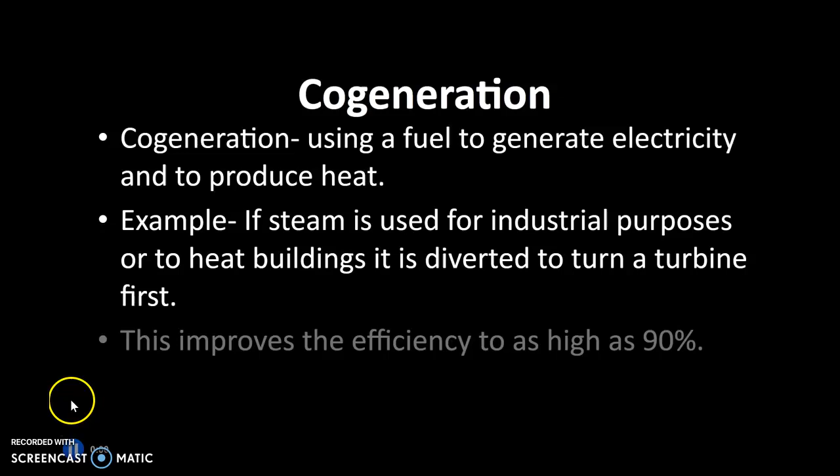This is the third lecture for chapter 16 and 17.

We are going to start off looking at cogeneration, which is something that is not commonly thought of, at least in the general public. It's the idea of using your generation of electricity for both the electricity, but also to produce heat. In the process of producing electricity, you're burning some type of fuel, whether it's coal or natural gas, and of course you're making steam, and that's turning a generator, creating electricity. But you do have this heat that is produced in the process, typically as steam, and you can use that to heat something up.

For example, at Michigan State University, they have their own power plant, and they are able to utilize that steam or heat to heat all of their buildings on the campus. It's something they've taken advantage of since the 1950s.

And of course, as you can see on the slide, it improves the efficiency of your process. Instead of just saying okay, we want electricity and the excess heat is just something that goes along with the process that we're not going to capture, most places do not, but it is a way of increasing the efficiency of that original energy resource, coal or natural gas.

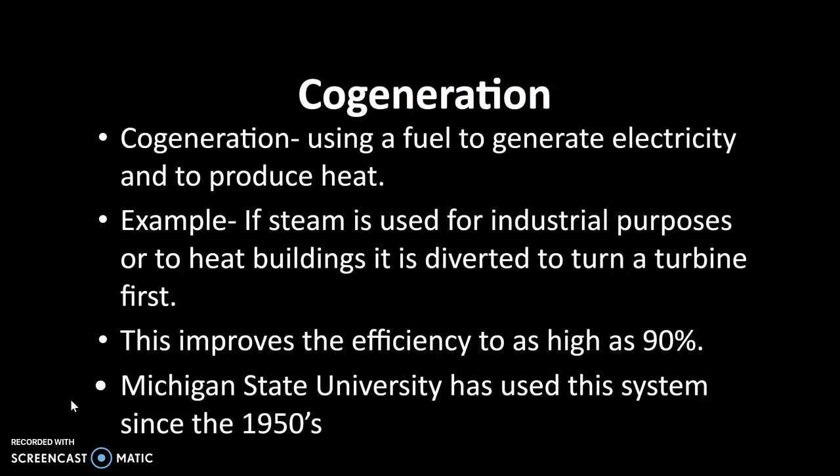In the process of making electricity or moving your car, or whatever you like to look at, that process always involves some level of inefficiency. Whenever you have a transfer of energy from one source to another, even the wind, there's some inefficiencies involved, and that all has to do with the second law of thermodynamics.

For example, in heating your home, that's quite efficient relatively speaking. Natural gas is pumped into your house, and you burn it right there to produce heat. That's fairly efficient, as opposed to electrical heat in your home. Some places do this, where you turn coal, natural gas, or nuclear into electricity that transfers to your house, and now you're heating up some element to heat your home. Every one of those transfers involves a loss of energy.

So you can see, for example, with power plants, useful energy, you're really only getting about 35% efficiency of the coal burning, which is why cogeneration is kind of nice too, because it increases that percentage up.

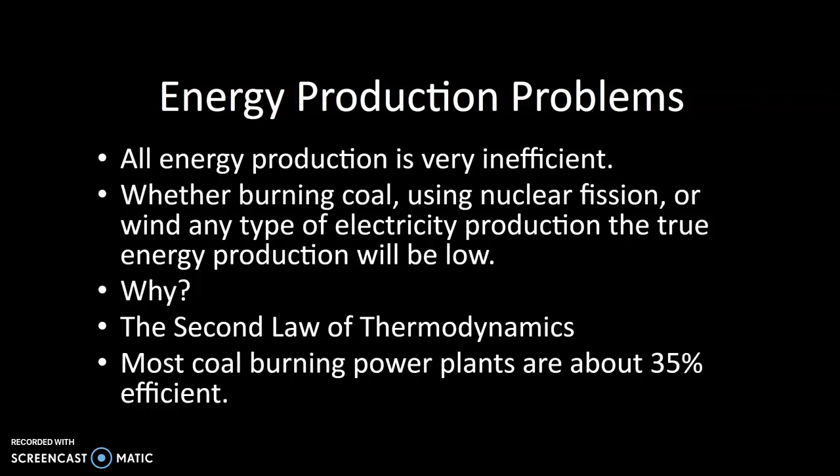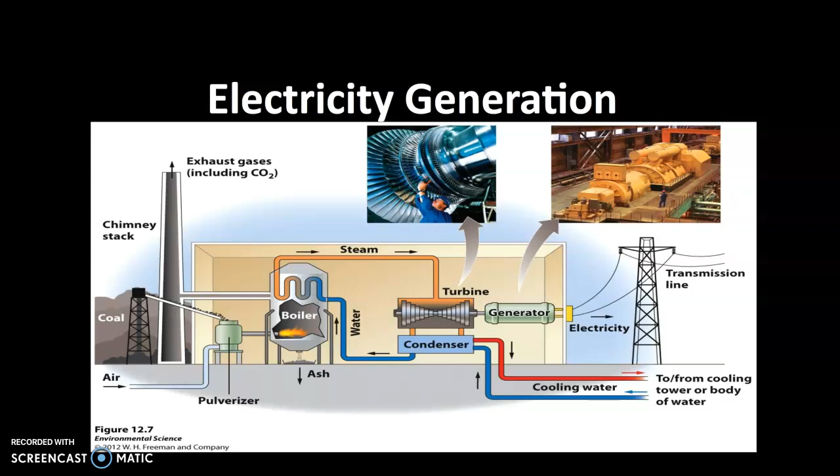This is just a rough schematic of that process, which I just talked about a second ago. I'm not going to spend a lot of time here, but you can pause it and take a look at all the guts of this. Notice a similarity with this to nuclear energy, which we'll look at shortly.

The process for nuclear is you're using uranium, and sometimes plutonium, to do the exact same thing as a coal power plant. You're just heating up water. That's all you're trying to do is heat up water, make steam, and turn a turbine. The only difference for a nuclear power plant is, of course, you're using these very dangerous materials to do that process.

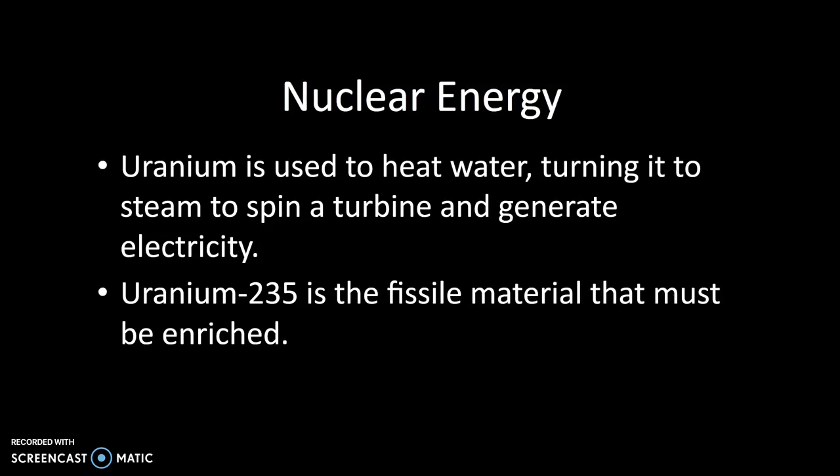You're not going to have an explosion like a Hiroshima bomb in a nuclear power plant. It's just not possible, it's not enriched to that level. But of course, you could have a Fukushima, an accident where you have radioactive material spilling out and contaminating an area for years to come, or a Chernobyl-type accident. So there's definitely risks involved in using nuclear.

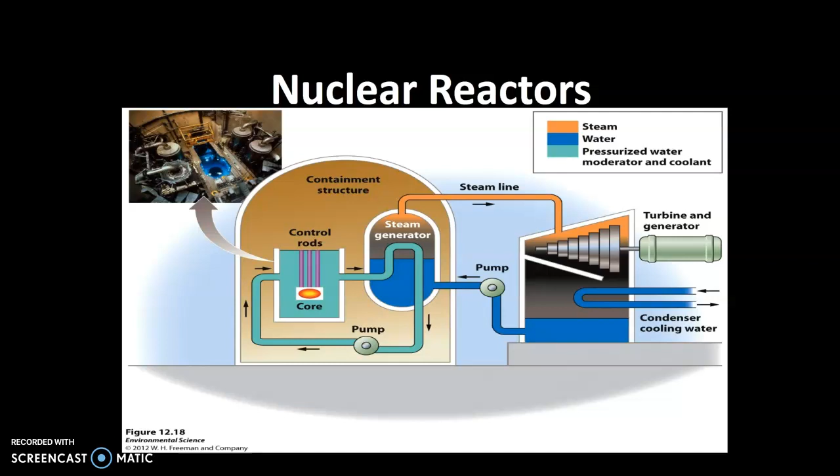Here's a schematic which is quite similar to the one from two slides ago, looking at the coal-fired power plant. It does the same thing. All you're doing is boiling water. That's the whole point of the process, to boil water to turn a turbine.

Again, looking at some of the problems with a nuclear power plant is the fact that you have this energy resource which is incredibly dangerous. In the environment, it is very spread out, and you're concentrating it, and now you have this waste material that, quite honestly, you just can't ever get rid of. And of course, with potential problems with terrorism, explosions, or natural disasters, you set yourself up for some problems in the future.

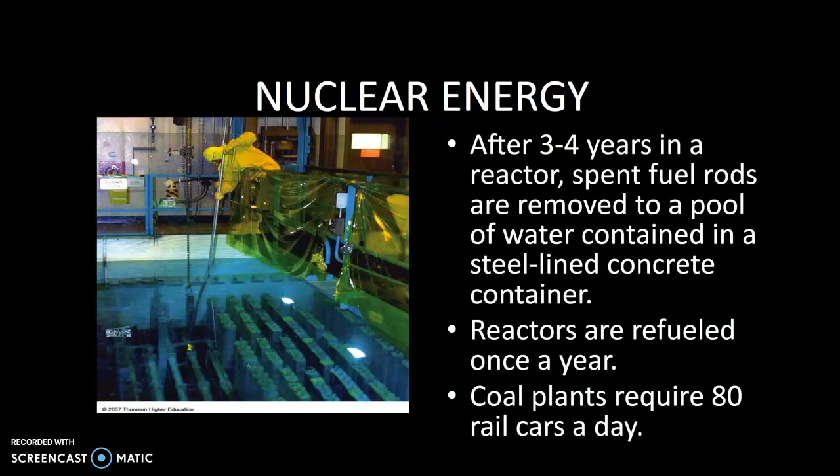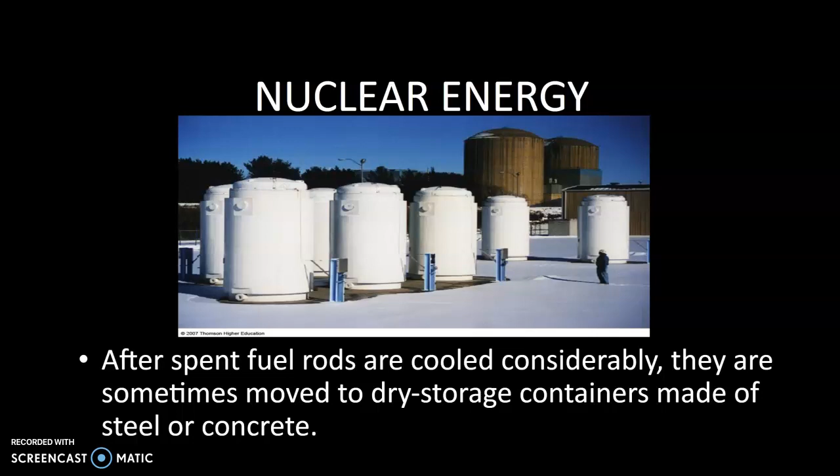Something that's interesting for all nuclear power plants is their waste materials are stored on site. We have some close to us, the Fermi nuclear power plant in the Monroe area. Every bit of waste they've ever generated in the last some 50 years is still there. Now granted, those things are very, very efficient, but every bit of their waste control rods or the nuclear fuel rods are still stored on site because you don't want to be moving those around because of potential problems that could happen.

In the last 30 years or so, we've made very few, if any, nuclear power plants. There is talk of making more, and some smaller ones. I've just been reading that in the news lately. Smaller nuclear power plants are always very expensive to make because of all the safety considerations that go into it.

When you look at the energy, it's rather cheap, but there's a huge energy cost up front, and then a never-ending cost after the use of the fuel that you have to deal with. And of course, all the public concerns and the potentials of what could happen make it relatively expensive.

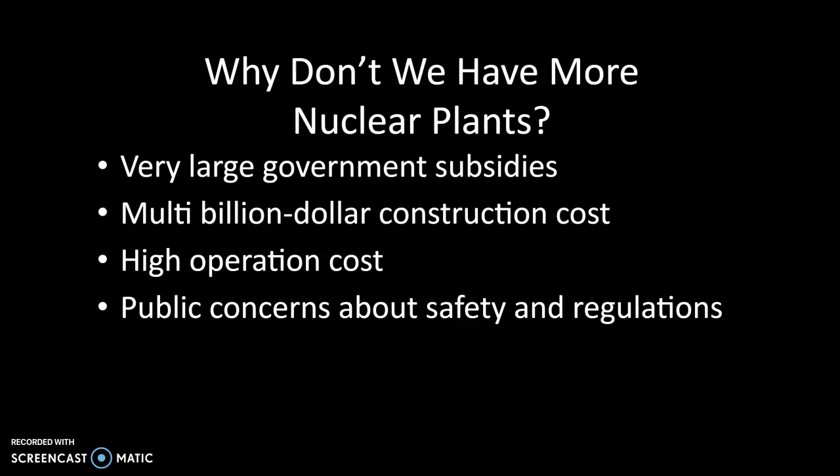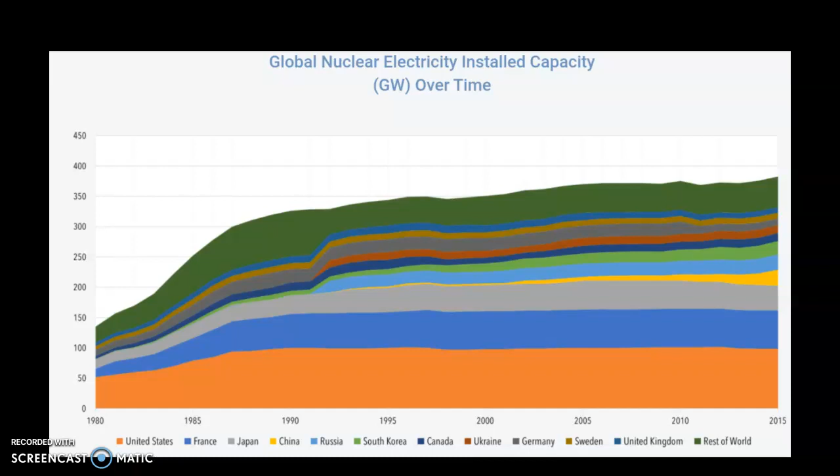This is looking at the capacity of nuclear energy over the last 40-some odd years. You can see it's been fairly constant in that time period, since maybe the last 30 years or so. So countries really have not invested a lot in this, with maybe the exception of China over the last 30-some odd years. It's been fairly constant, and countries are starting to look for different resources to make energy.

I've talked about this a little bit, that a lot of our nuclear power plants have reached the end of their productive lifespan, and just based on wear and tear, they need to be decommissioned. And we keep recommissioning them and extending their lifespan out further than what was supposed to be. This is something that we're dealing with now, and decisions are being made, or have to be made, about how long these things can last without potentially having some problems.

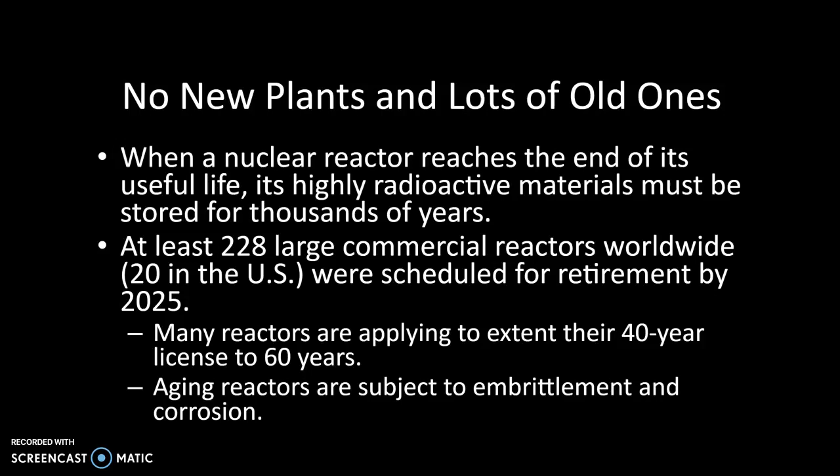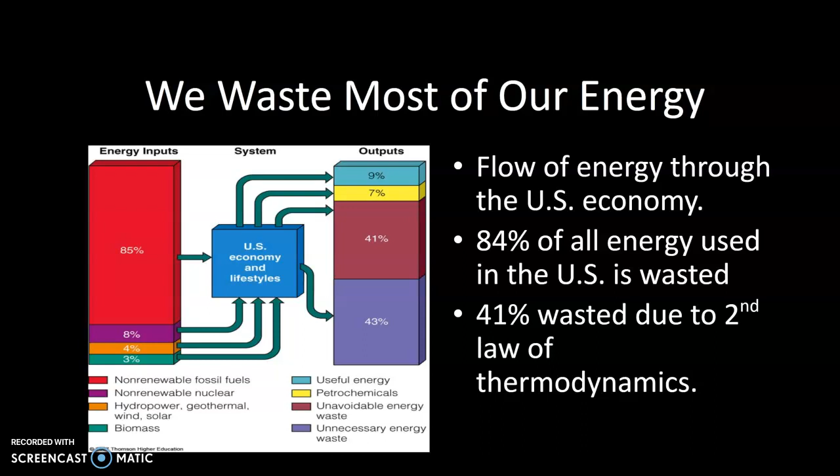All right, fusion is the ultimate goal. This has just been in the news very recently. In Japan, they're just starting to - I don't want to say get it to work, because 5 seconds is not a huge victory - but they have gotten real fusion to work, in which they're heating something up to 150 million degrees, which is the relative heat of the center of the sun. Now, of course, because that is so incredibly hot, it's very difficult to maintain. But you're getting more energy out than you're putting in, so that's, of course, a very big deal. But realistically, scientists have not been able to get this to work yet. It is the hope as far as energy production that if we ever do get this to work efficiently, it will solve a variety of problems.

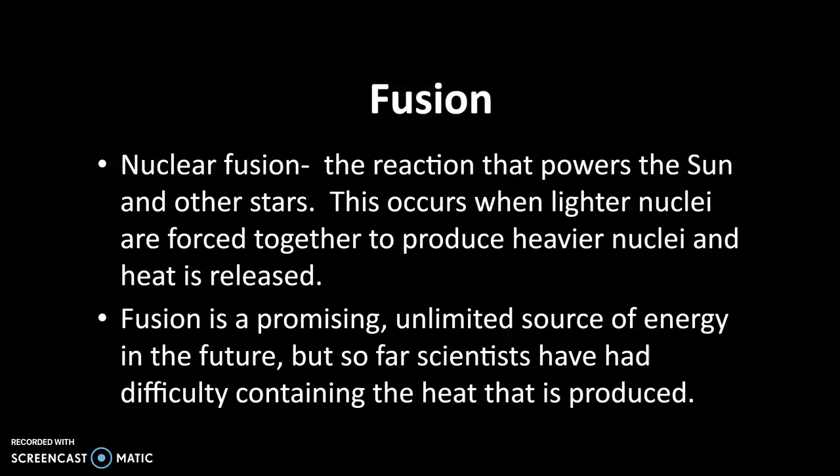This is a slightly different version of fusion. They call it cold fusion. A better name would be low energy nuclear reaction, and we can talk about this in class if we have time to bring it up. It's another way of getting more energy out than energy put in, but it really hasn't moved far as a commercial product. Still, it is another thought of something that engineering is pursuing.

These are some things that are very wasteful in the way we have used energy, some that we still do and some that we haven't anymore. Incandescent light bulbs are really a thing of the past - we don't use those much anymore because they are so wasteful, and we have some good light substitutes for that. Car engines are incredibly inefficient - the internal combustion engine, sometimes called ICE - and you can see the percentage on it that most of the energy produced just goes off as heat. Nuclear power plants, and you can see the other ones on there as well. So anytime you're using a fuel source to create an energy transfer, you're going to have inefficiencies involved.